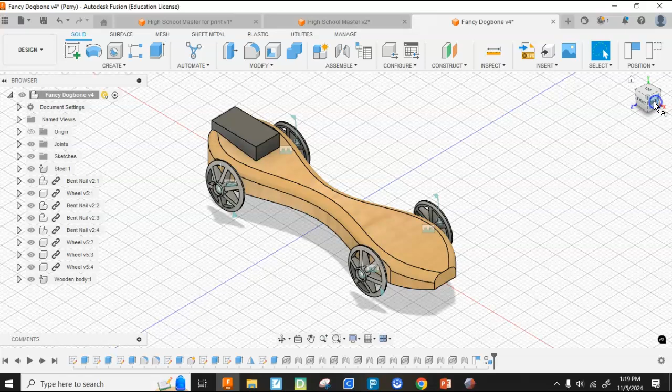So here I have an assembly. I have all components, there are no bodies, but all these are individual components. They've been linked together. This wheel is higher on purpose because only 3 will ride. The wheels are canted in slightly. They've used the bent nails, and this would represent a final design.

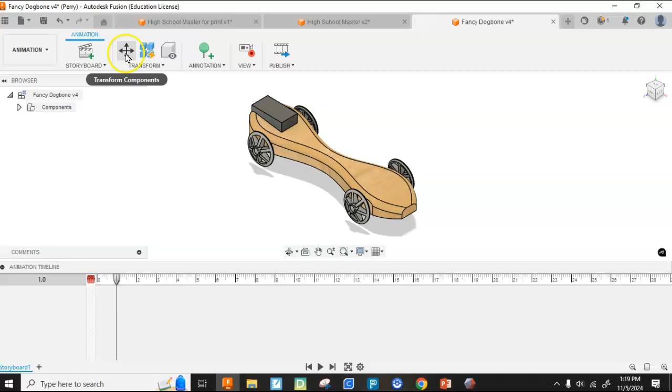So I'm going to start by going up and changing my workspace from design to animation. And once in animation, I'm going to come up here and hit transform. And then I'm going to start selecting components.

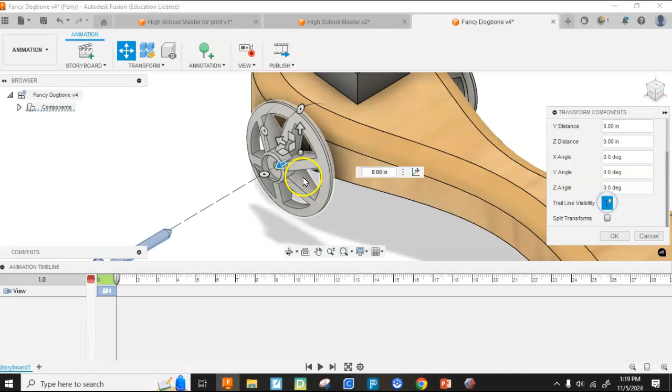The first thing I'm going to do is take all of the nails the same amount. So I'm going to grab that nail and drag that out a distance of 2.5, and just literally enter. I'm going to come over here and turn the trail line on, you can see what that does. I'm going to come around and do all the nails, taking them straight away from the body, all going the same amount, 2.5, and I'm going to hit trail lines as I do that.

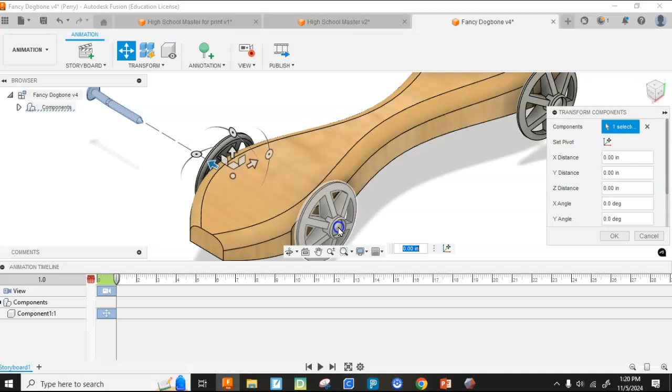I'm going to go ahead and come around to the other side, choose this nail. Oops, I don't want the wheel yet. I'm going to hit Control Z and see if I can do a better job of selecting the nail. Drag it out 2.5.

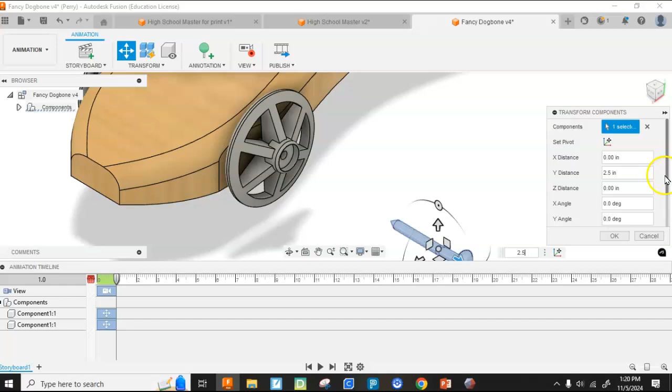I'm just going to do the same amount. I probably could set that as a default, but I'm just going to be a little bit lazy. So I'm going to go in there and drag all these out 2.5, and try to make those go.

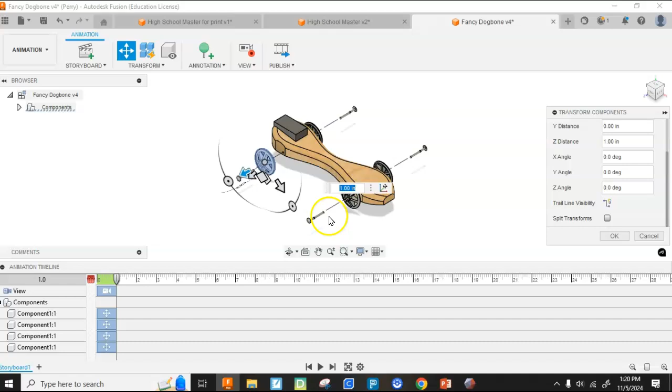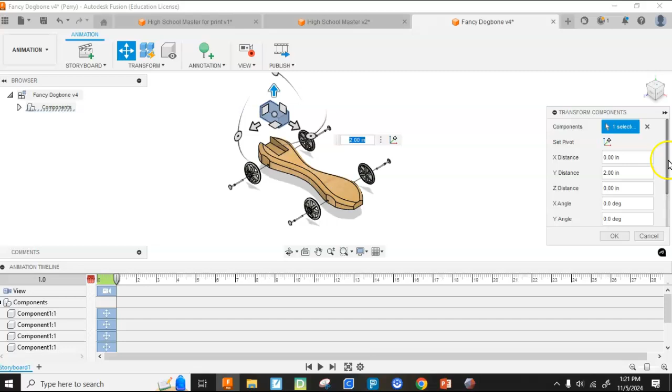Now I'm going to do the wheels, and again those I'm just going to take out 1 inch, 1 inch, 1 inch, and 1 inch. I'm just taking a peek at it, that looks pretty good. The last thing I'm going to do is take this steel weight and take it upwards, turn on the trail line for that one, and hit OK.

So at this point now, I'm going to go up and change my workspace again, from animation to drawing, specifically drawing from animation.

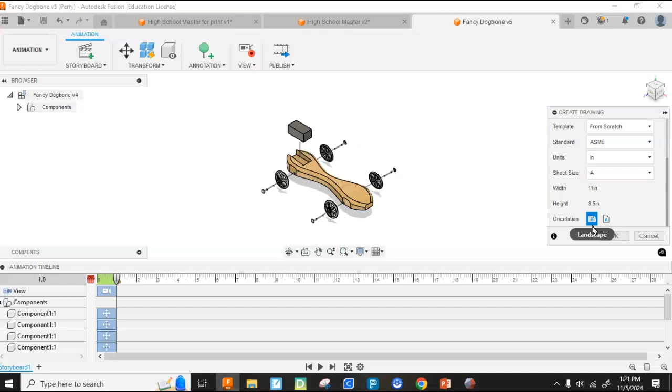So over here I'm going to select my paper. I want that to be size A, that way. And I believe that I do like landscape — you can toggle, it doesn't really matter which one you'd go with. But it's going to go ahead and generate my drawing workspace.

So I'm going to bring this over here and put that right there, hit OK. Then I'm going to come up to table, and put my table on right there. And please note that it already has everything in there.

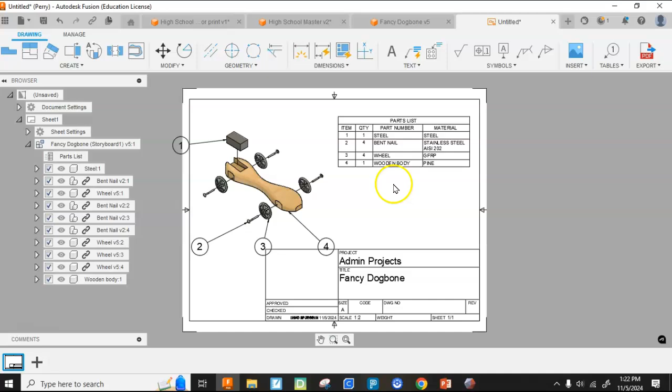And now I'm just going to move this on a little bit and perhaps move these so that they're not overhanging — this is just cleaning it up. But now I have a fully exploded assembly with everything labeled.

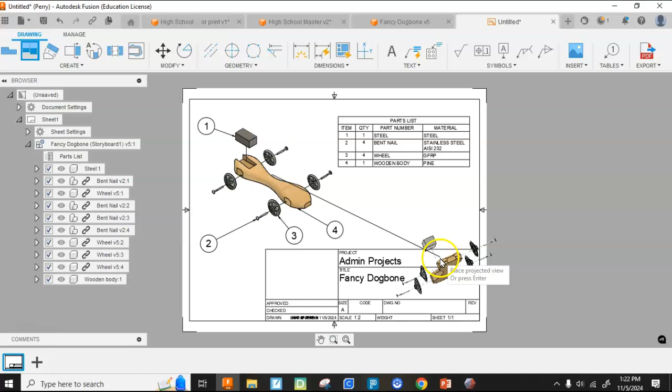I could spend some time making it prettier, and certainly I'd get rid of anything I wanted out of this, but this is an exploded assembly of my drawing. I certainly could manipulate it different ways, and this would be a good exploded assembly, and past this I could play with it however I want, but it's been 4 minutes and I'm stopping there.